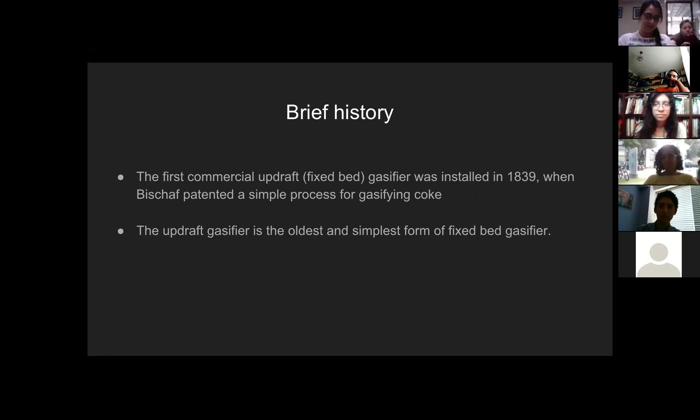So the brief history that we found is that the first commercial updraft gasifier was installed in 1839, when Bischaf patented a simple process for gasifying coke. Also, this kind of gasifier is the oldest and simplest form of a fixed bed gasifier.

The ash is removed from the bottom. Finally, the main product desired in the gasification is the syngas, which is a gaseous mixture composed mainly of carbon monoxide, carbon dioxide, and hydrogen.

So the specific conditions... Genesis, do you want to say that part? Yes, can you hear me? Can you hear me? Yes. Okay, specific conditions.

The feeding of the gasifier, the thermal power of gasifier, the biomass mass flow rate, and the producer gas flow rate are shown. Ah, no, they're not here. Sorry.

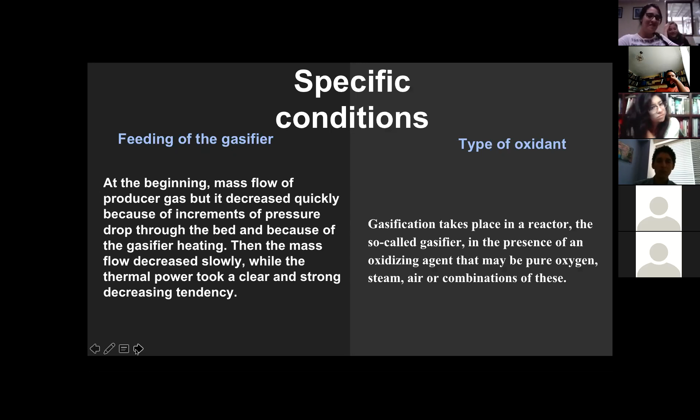At the beginning, mass flow of producer gas was higher, but it decreased quickly, because of increments of pressure drop through the bed and because of the gasifier heating. Then the mass flow decreased slowly while the thermal power took a clear and strong decreasing tendency. Probably at this point, the bed was too dense for the gasifier to work properly.

Later, the type of oxidant. Gasification takes place in a reactor, the so-called gasifier, in the presence of an oxidizing agent that may be pure oxygen, steam, air, or a combination of these.

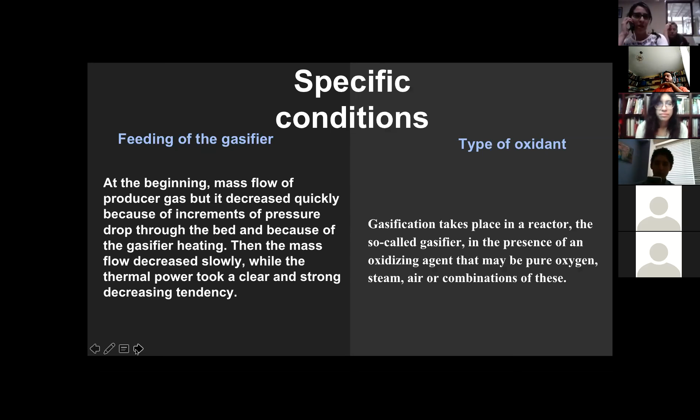And okay, here are the temperature ranges. The gasifier operates at 1,450 to 2,000 Fahrenheit, with syngas exiting at 500 to 1,400 Fahrenheit, and here is the operating pressure.

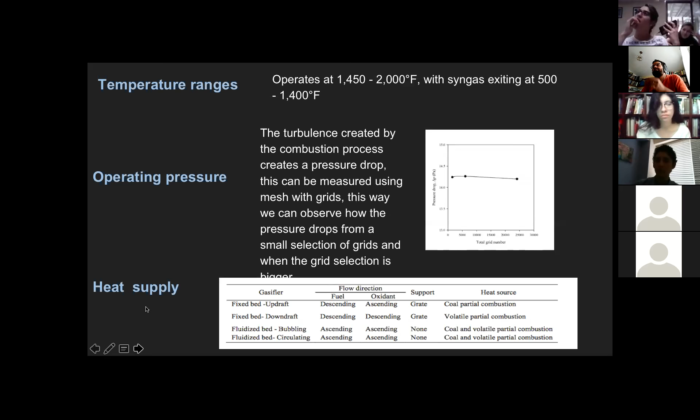And here we have a table with the heat supply from the... the one above. And the next one. Ah, sorry. Thank you.

Then we had concrete examples of industrial gasifiers. We found that the producer gas is rich in hydrocarbons and especially tars, and therefore has a higher calorific value, which makes updraft gasifiers more suitable where heat is needed, for example in industrial furnaces. The producer gas needs to be thoroughly cleaned if it's going to be used for electricity generation.

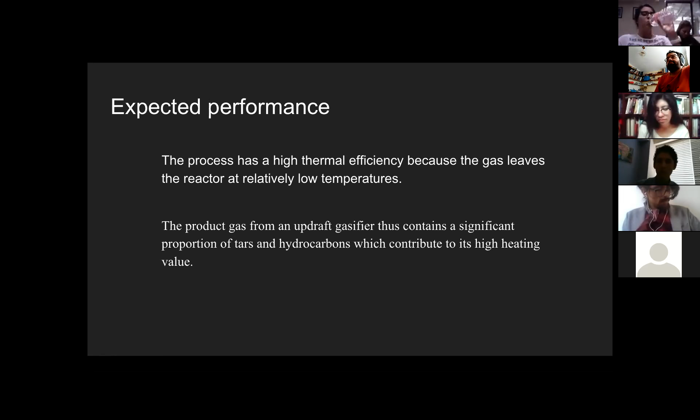Also, we found that this technology is mostly used in thermal applications. The expected performance shows the process has a high thermal efficiency because the gas leaves the reactor at relatively low temperatures. On the other hand, the product gas from an updraft gasifier contains a significant proportion of tars and hydrocarbons, which contribute to its high heating value.

And finally, the conclusions: we found that this kind of gasifier has advantages such as being a simple and low cost process, and also being able to handle biomass with high moisture and high inorganic content. But we also found that the primary disadvantage of this gasifier is that the syngas contains 10 to 20% tar by weight, requiring extensive syngas cleanup before engine, turbine, or synthesis applications.

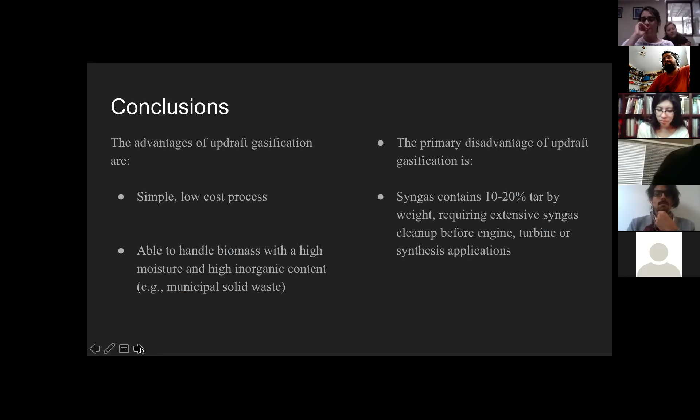And that's all. So this system is one of the most efficient. Yes, it is.

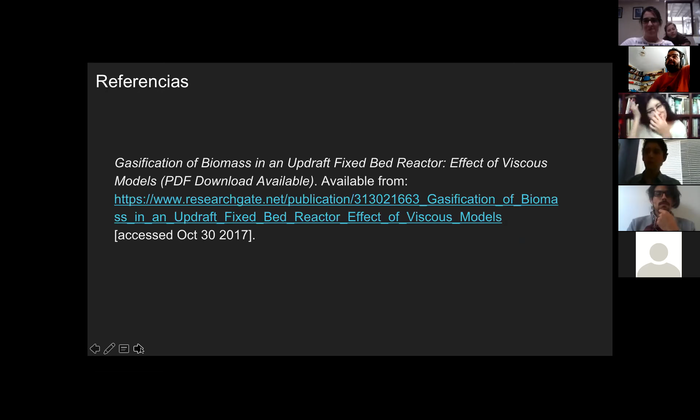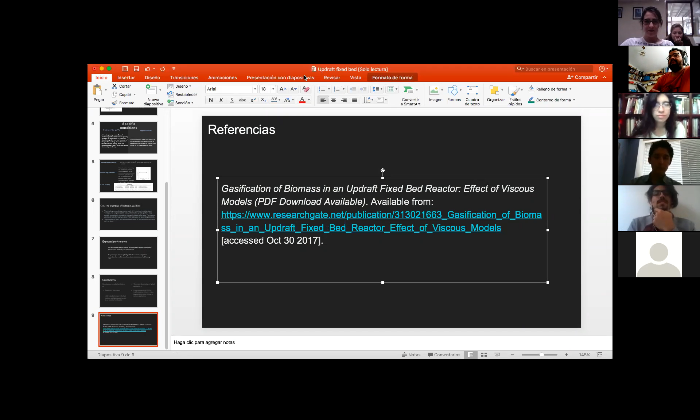One thing you didn't address is that the syngas from that specific gasifier is not a clean gas, right? It has a lot of components like CO2 and some tar that you don't want in your syngas. So it's a dirty syngas, and that should be corrected afterwards, right?

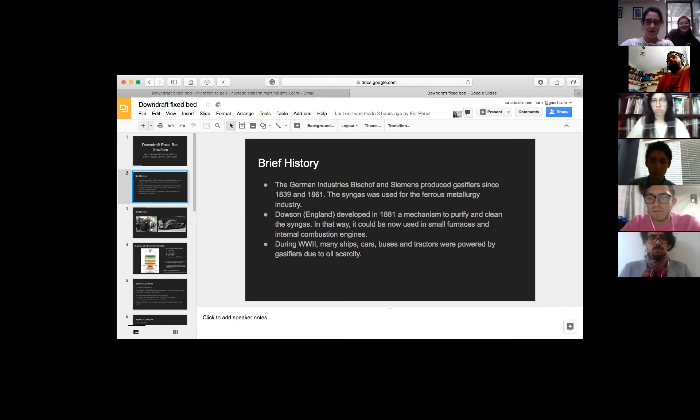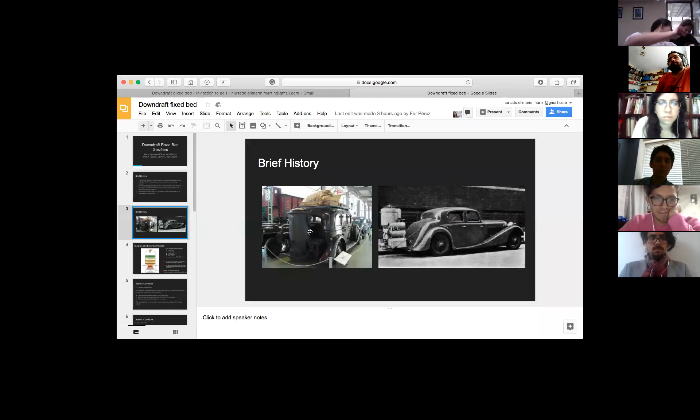Here we can see some examples of cars that had their own gasifier that produced the syngas in order to power them. These cars are from 1941.

Here is a diagram of a downdraft gasifier. We can see that the feedstock is at the site of the gasifier where the biomass enters at the top. After the feedstock comes the drying zone, where temperatures of 100 to 150 degrees Celsius are reached. After this zone comes the pyrolysis zone, where temperatures of 300 to 500 degrees are reached, and here a process of decomposition takes place, with a reassociation of chemical bonds in the presence of little or no oxygen.

After that, there is an air entrance where the combustion process takes place, and in this part the higher temperatures are reached. The tar decomposition takes place, and that results in a less pollutant flue gas and a better conversion to carbon monoxide and hydrogen.

After the combustion section comes the reduction zone, where the syngas is finally formed, consisting mainly of carbon monoxide, hydrogen, and carbon dioxide. Here at the top we can see the main composition of the syngas: not only carbon monoxide, oxygen, and hydrogen are produced, but it also has a significant amount of nitrogen and methane.

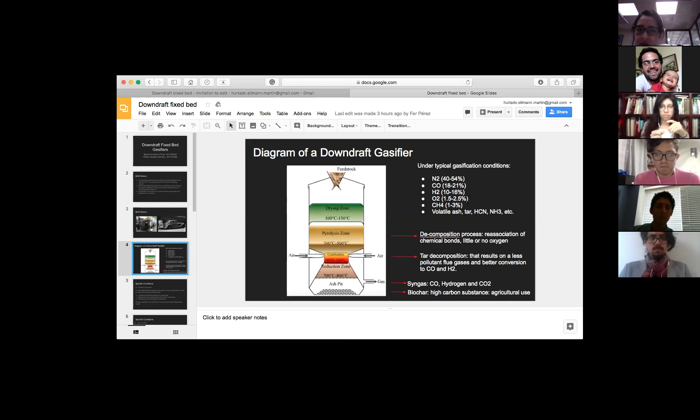We are going to see the specific conditions in which the gasifier operates. This gasifier is generally used for the gasification of wood biomass with the following characteristics: the biomass should be uniformly sized, especially in blocks, which is the best way to feed the gasifier, and it must flow at a constant rate. The moisture and ash content of the biomass is also very important, as it has to be less than 20% and 5% respectively. The biomass put inside the gasifier has to be high density woody biomass, because that way we can have a better syngas composition. This type of gasifier is very sensitive to the size and quality of the biomass feeding.

The type of oxidant is a very crucial parameter to regulate in this gasifier because it determines the calorific value of the syngas obtained at the end. The common oxidants used are oxygen, water vapor, air, or a mixture of them. When we use just air as the oxidant, the syngas will have a lower heating value, so it's not as good as if we used just oxygen. But the best option is to use just steam or a combination of steam and oxygen.

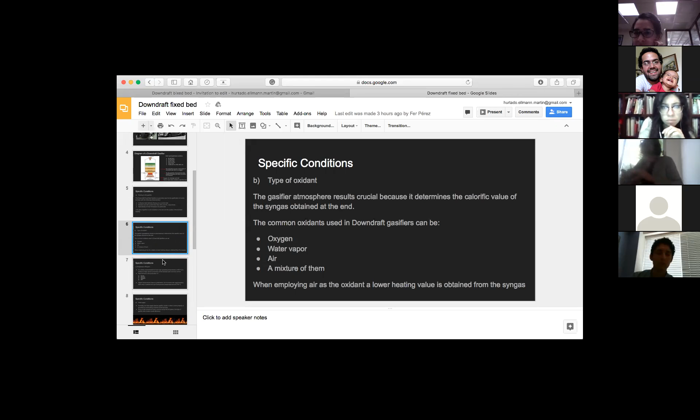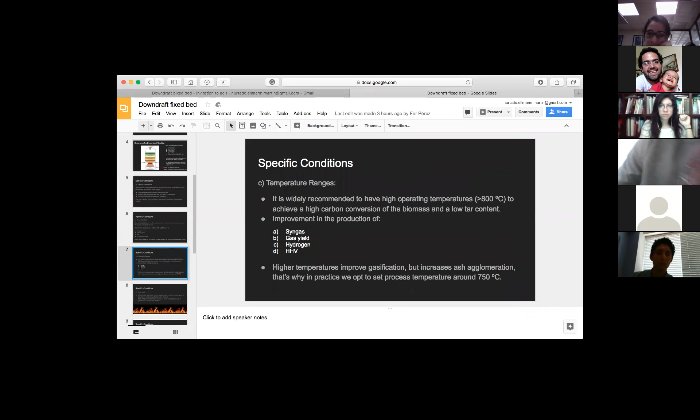The temperature range in which this gasifier operates is very important. It is recommended that the gasifier operates at temperatures above 800 degrees Celsius to achieve a high carbon conversion of the biomass and a low tar content. By reaching temperatures as high as 800 degrees Celsius, we can improve the quality of the syngas, the gas yield, the hydrogen content, and get a higher heating value. But at higher temperatures, although the gasification process improves, it also increases ash agglomeration, so in practice we opt to set the process temperature around 750 degrees Celsius.

The heat supply normally comes from the biomass that is combusted, a fraction of which is employed for this purpose. Since a high amount of heat is carried out by the hot gases, this type of gasifier is a little less efficient than the previous one we saw with the previous team.

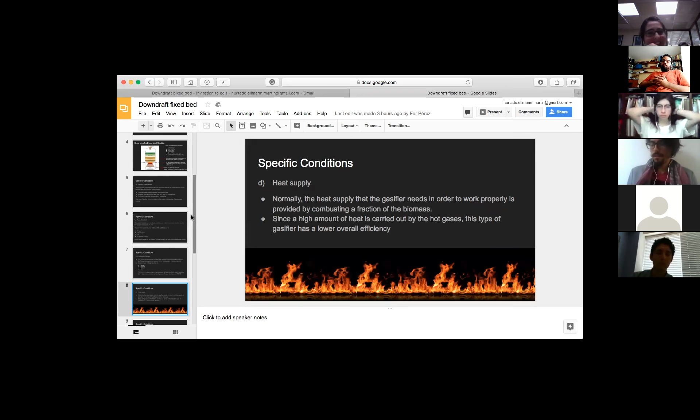The operating pressure of these gasifiers is often conducted under atmospheric pressure, though some can operate under high pressures. Pressures are generally measured in centimeters of water column, and 1 atmosphere is equal to 1,029 centimeters of water.

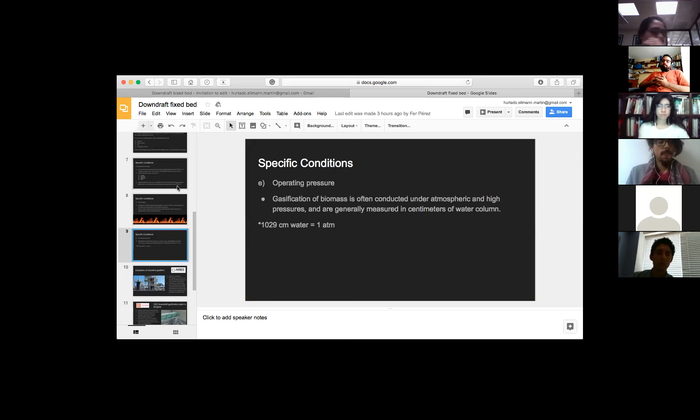Now examples of these gasifiers in industrial processes. The first one is in the city of Lebanon, Tennessee, made by the company Aries Clean Energy. It has a full capacity of up to 64 tons per day of waste and produces up to 420 kilowatts of electricity. It produces syngas using wood waste, scrap tires, and sewer sludge as fuel, which are then converted to on-site electric power for the operation of the wastewater treatment plant in the city.

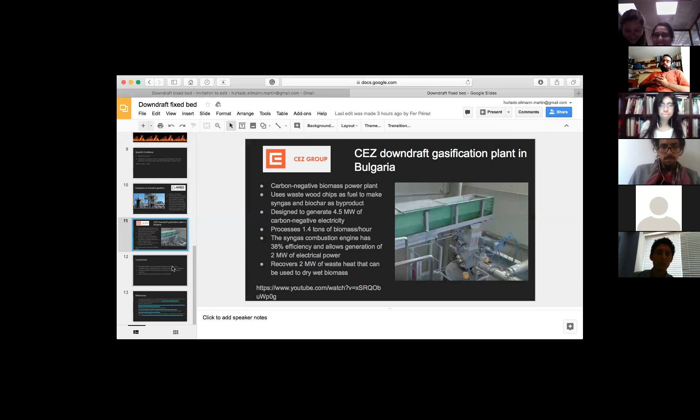As conclusions, downdraft gasifiers are a good option for using biomass as fuel because they are a competitive way to obtain fuel gas for combined heat and power generation. This type of gasifier requires the biomass feed to be in very specific conditions, and as we saw from the previous example, cleaner byproducts can be obtained from this process.

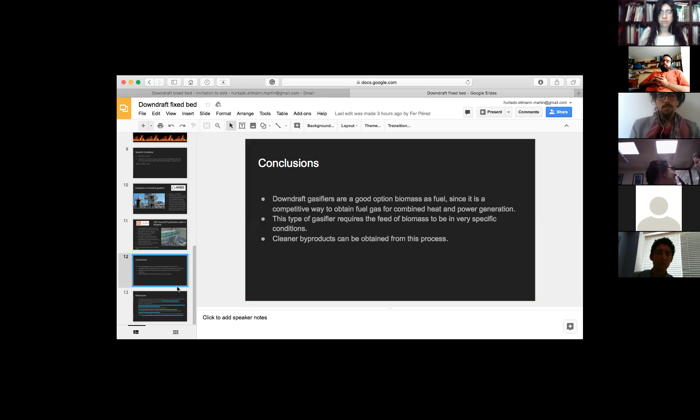No, teacher. Okay, the only problem with that particular gasifier is that the heart of it, where the pyrolysis and combustion take place, is very difficult to design because any leakage of air will produce a different combustion. And if the heat doesn't stay at the heart of the gasifier, the whole process starts to run badly. It doesn't allow the reduction zone to convert carbon dioxide to carbon monoxide and hydrogen, and so on. So that's the problem with that gasifier.

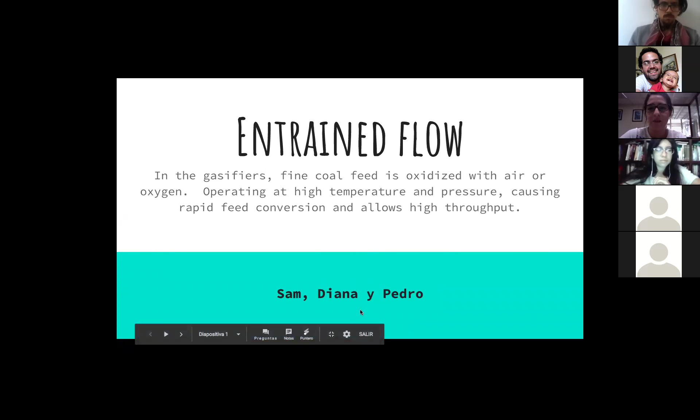This type of gasifier operates at high temperature and pressure, which helps create rapid feed conversion and converts the coal into energy.

This gasifier has existed for more than 200 years, and nowadays it has become a better solution to convert energy, because natural gas has increased in price, and its transportation has become difficult since it comes from different countries.

Also, this gasifier is fundamental for energy conversion technology, because that technology is based on synthesizing any carbon-containing material into gas. This adds value to low or negative value feedstocks, turning them into marketable fuel products.

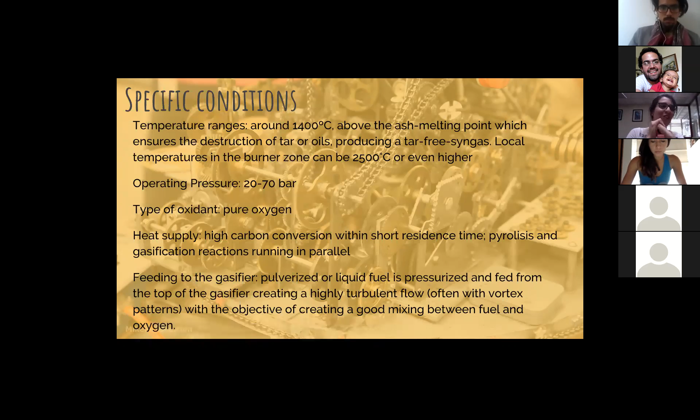So in this company, the technology most used is the one applied at dry feed pressurized, the one that Sam explained in the last slide.

Also, this type of gasifier works preheated, 95% with pure oxygen and steam, and in this case they are mixed. The gasifier doesn't only work with oxygen or only with air, it works with both.

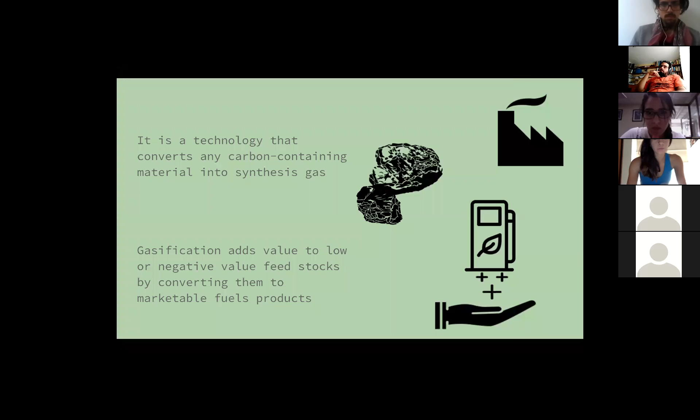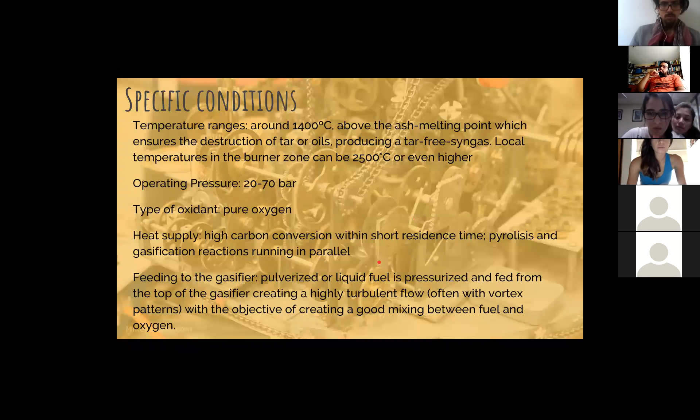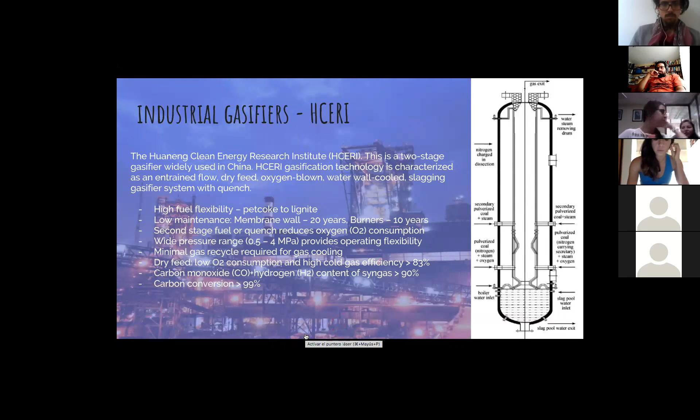It has high fuel flexibility, it can take any type of fuel as long as it's pulverized. It also has low maintenance and lasts approximately 20 years. It has low O2 consumption, and in general these gasifiers have very good conversion efficiency, typically above 80%, and for this one it's over 99%.

Taking into account all the specifications of this type of gasifier, its main advantages are good fuel flexibility, though this can cause some problems I'll mention later. It also produces a generally tar-free syngas, meaning less residue to clean in the process. It has very high carbon conversion, approximately 99%, and a short residence time. According to the National Energy Technology Laboratory, it's considered the most environmentally benign gasifier.

And its main disadvantages are...

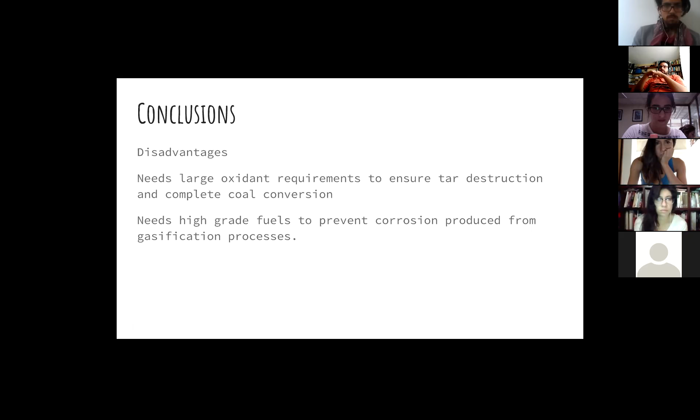Do you have any questions, guys, about this one?

This gasifier is one of the most efficient, but at the same time you need to design it very carefully, because the current of the oxidizer and the fuel have to meet correctly at certain points in the gasifier for it to be gasified. Otherwise it's only going to be combustion. So you need a gradient of oxygen through the gasifier, so that at the bottom part you can have the reduction reactions to obtain the CO and hydrogen. So it's interesting, but it's difficult to obtain good results.

So now we have team number 4: Gabriela, Monse, and Ricardo. Are you ready, guys?

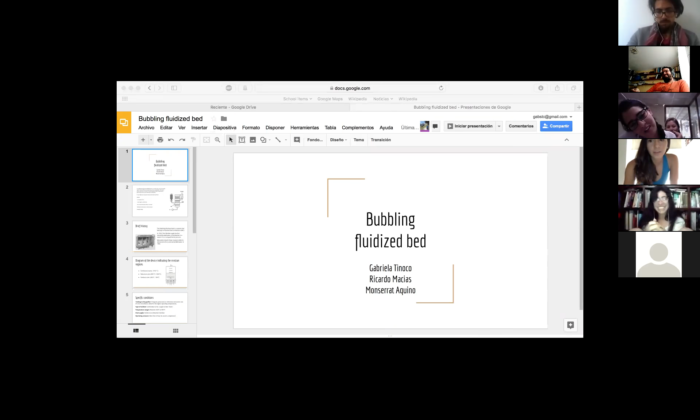Hi. We're going to explain the bubbling bed boiler. This boiler can also handle fuels that are difficult to pulverize or less combustible.

This technology has been used primarily by the pulp and paper industries to burn wood, as well as peat and other low heat fuels. Next, please.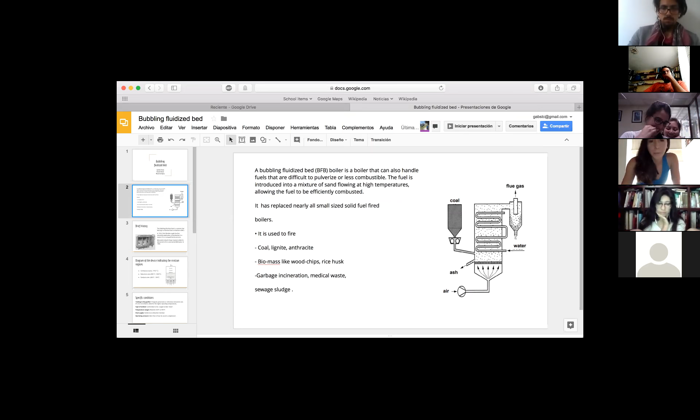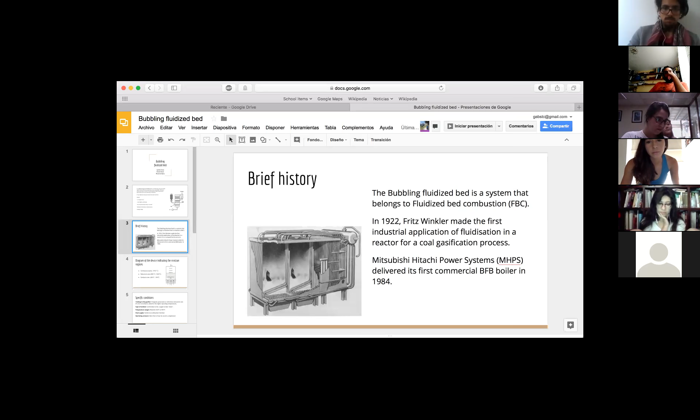A little story: the bubbling fluidized bed is a system that belongs to fluidized bed combustion and shares the same history. The first technology was invented for Mitsubishi Hitachi in 1984.

In the reduction zone, the products of partial combustion, water, carbon dioxide, and uncombusted partially cracked and pyrolysis products pass through a red hot charcoal bed where further reactions take place. Heat temperatures in the reduction zone are normally between 800 and 1000 degrees. The lower reduction zone temperatures were around 700 to 800, more or less.

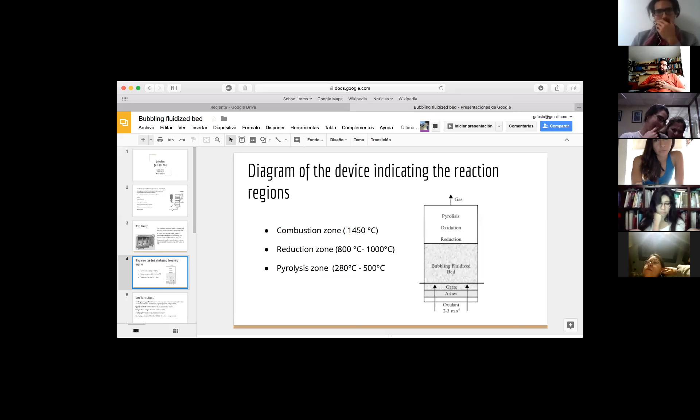The next zone is pyrolysis, which takes place between 280 and 500 degrees. For the specific conditions, the feeding has to be chopped, pulverized, reduced in size, and dried for the gasifier to operate at high temperatures.

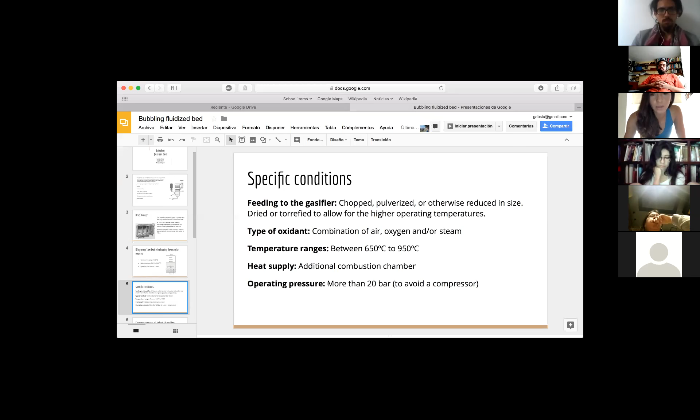The type of oxidant can be a combination of air, oxygen, or steam. The ranges are between 650 and 950 degrees. The heat supply is usually an additional combustion chamber. The operating pressure is recommended to be more than 20 bar, to avoid a compressor, but this is related to the feeding having those specific characteristics.

We found three concrete examples of industrial gasifiers. The first one was the KBR transport gasifier. It was tested and proven at the Power System Development Facility in Wilsonville, Alabama. It operates either with oxygen or air, as mentioned before. The design is based on fluidized catalytic cracking technology, and internal temperatures are around 1500 to 1950 Fahrenheit, depending on the fuel. It also operates at a high solid recirculation rate, resulting in excellent gas-solid contact in a highly turbulent environment.

When air is used, it's for power generation, and when oxygen is used, it's for fuels production.

This is the second example: the high temperature Winkler gasifier. It was also tested in Germany. It operates either with oxygen or air, and has a dry feed pressurized dry ash design, capable of gasifying different feedstocks including low-rank coals with a higher ash softening temperature, and also many biomasses. The resultant gas has no high molecular weights, and solids are removed in the cyclone and returned to the gasifier base to maximize carbon conversion.

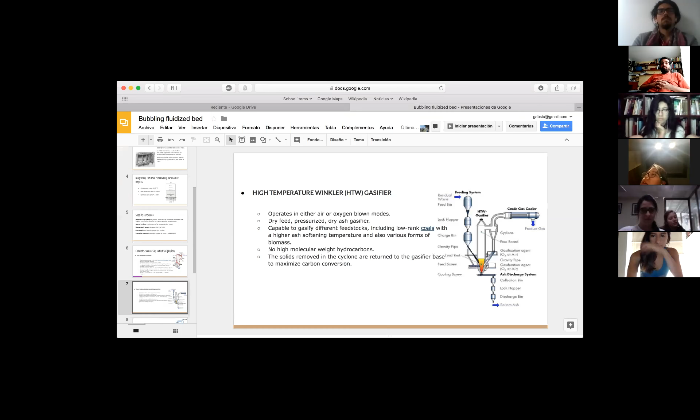There's an image of the whole process. It's kind of complicated, but this is a summary.

This is the third example we found, also called the high temperature Winkler gasifier. It uses U-gas gasification technology. The fuel reacts at temperatures from 840 to 1100 degrees, and a pressure from 3 to 30 bar. The syngas can be used for heating applications, generating power, or making chemicals or fuels.

In the reaction, big ash particles are formed, and the ash is removed from the fluidized bed by gravity. This design ensures that the larger ash particles exiting the gasifier contain minimal amounts of carbon, aiming to have 95% or more of the fuel's carbon gasified.

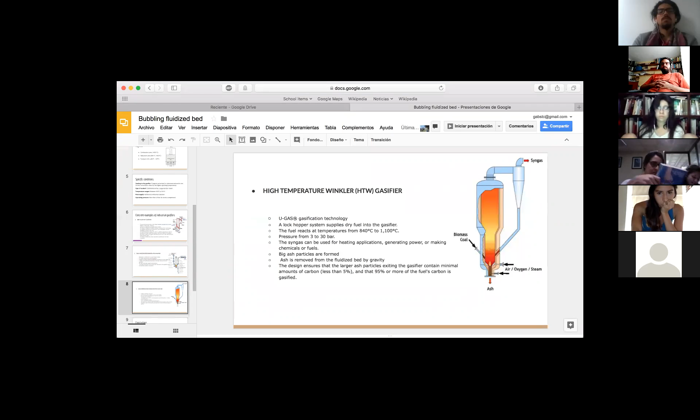As mentioned before, particle size reduction and drying the biomass are necessary. Gasifiers of this type are the lowest capital cost options for biomass, and are also quite suitable for fuels, chemicals, and hydrogen production. That's all.

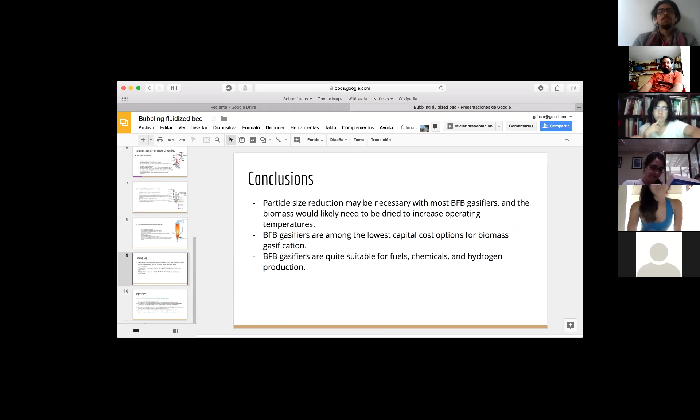So, guys, I remember the class we had about... what was the name of that one? Operaciones de transferencia de momentum. Well, that one, yeah, we saw the bubbling beds, right? It's the same principle, of course. The whole point of using a packed bed or a fluidized bed is to have all the fuel getting everywhere, so the reaction is better, right?

We're going to talk about circulating fluidized bed. A brief history of this process: in 1921, Fritz Winkler discovered how to optimize the Haber-Bosch process and the main principle of coal gasification. In 1938, Warren Lewis and Edwin Gilliland discovered fluid catalytic cracking and also the fast fluidized bed process. In 1960, Douglas Elliott also discovered the bubbling fluidized bed. And finally, also in the 60s, the Ahlstrom group started commercializing the first circulating fluidized bed gasifiers.

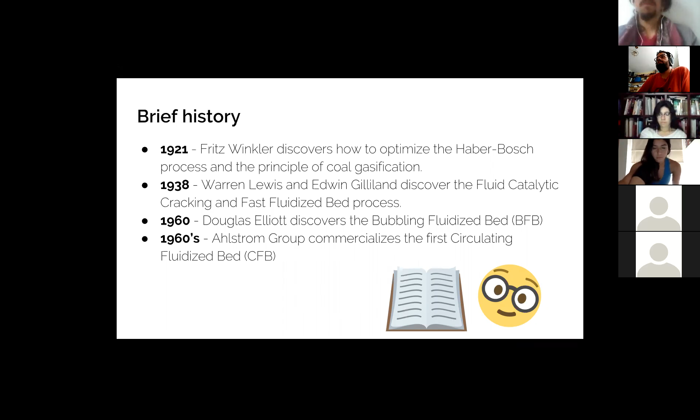For this diagram, first, the function of a circulating fluidized bed is mainly through a fluidization mixing process. What happens here is that the fuel is not burned with fire like the fixed beds. Instead, in the circulating fluidized bed, air is supplied from the bottom of the chamber at high pressures, and this lifts the bed material and the coal particles, keeping them in a suspension state. In this state is where the coal combustion takes place.

Also, the process of fluidization or mixing is through this path. The particles of coal that are not burned or combusted keep running through the cycle, and the gas that is provided by this process goes through this path. And finally, there is the syngas that all of my classmates talk about. Well, it's essentially that.

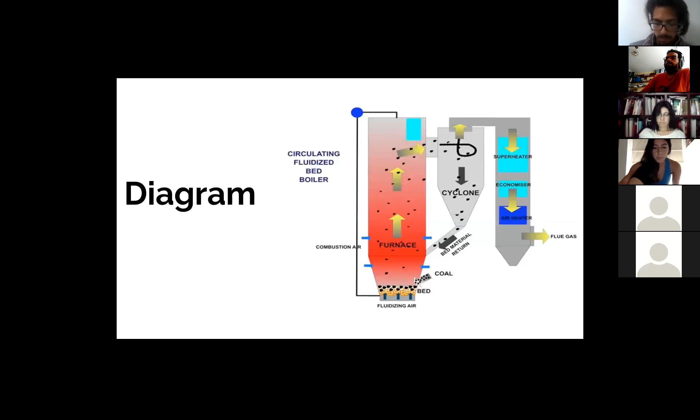Also, with the coal particles and all the fuel used here, limestone is mixed, and this limestone captures the sulfur oxides, which makes the quantity of pollutants not as big as in other processes.

The specific conditions for feeding to the gasifier: steam is fed into the base of the fluidized bed through a sparge pipe type of distributor. The type of oxidant is, in most systems, oxygen, but some articles test with butane, though all the systems use oxygen. The temperature ranges are 850 to 900, and the heat supply comes from burning the char in the lower section of the bed.

And the operation pressure is 285 bar, but the oxygen is supplied in the chamber as primary air and secondary air. The secondary air can be at other levels to improve the combustion.

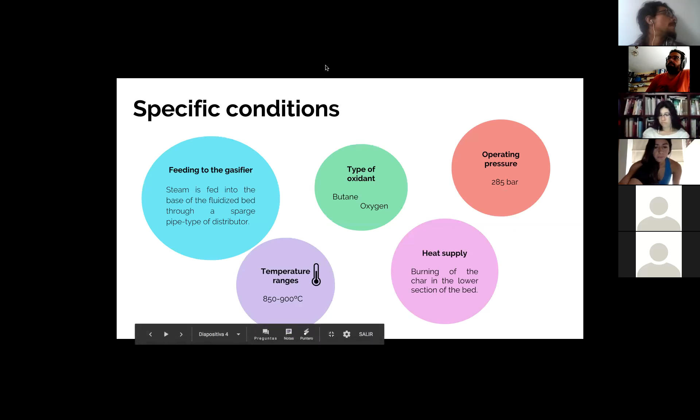This example produces energy, 150, and they have 2 cyclones to improve the efficiency. You can see this cycle, the first in the part of this cycle, and then the other is more in the... and these use coal or waste fuel like pine and bark. Their temperature function is 535, and their pressure is 113.

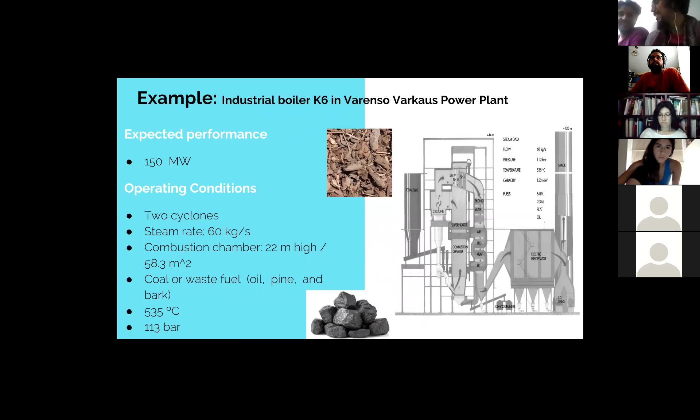For our conclusions, first, this process has a lot of fuel flexibility. For example, it's not restricted to just one type or size of fuel, unlike some fixed bed gasifiers. Coal residue, wood residue, gas, and also agricultural waste like straw and husk can be used, and the efficiency is still going to be in the same range.

In this case, the efficiency of this type of boiler goes from 97.5 to 99.5%, and this is also because it has better gas-solid mixing from the process I explained earlier, and also because of the higher burning rate that comes from the fluidization mixture between the coal particles and the limestone. Also, because of the low combustion temperature, there are low emissions of nitrogen dioxide and also lower emissions of sulfur dioxide. However, the emissions of nitrous oxide are higher.

Also, something we didn't put in here: this kind of gasification process is used in the Fischer-Tropsch process, which is known as one of the main processes to produce liquid fuels from coal and also from biomass. So using this kind of fluidized bed boiler can make these types of processes more environmentally friendly. And that's it.

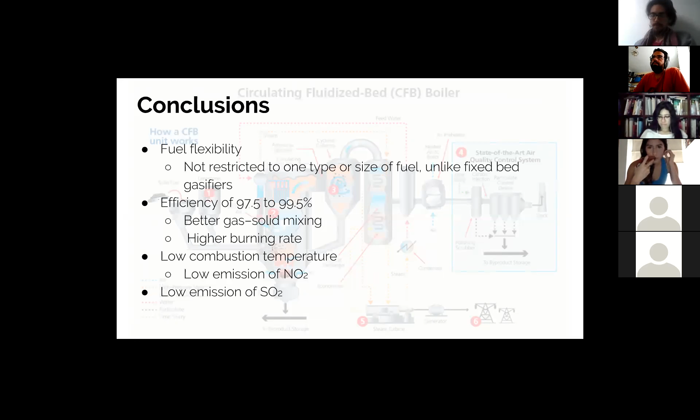Very good, guys. Do you have any questions for this team?

One thing that I find interesting about these gasifiers is the use of limestone, right? So they add a pollutant management system inside of the gasifier. That one is interesting, and of course the use of any kind of fuel is very interesting too. Sam, you have a question?

Yeah, I don't know if they explained it, but I didn't get why the pressure needs to be so high. The what? The pressure, I think they said it was like 200 bars or something like that. Yeah, around 200 atmospheres, right? Yeah, why is it so high? In the other ones it wasn't that much.

Can you answer that question, girls? I think it's because of the principle of the process. I read a little bit about that, and to have most of the coal particles in suspension, higher pressures are needed to allow this. If you have lower pressures, the air coming from the bed is not going to be enough to suspend the particles and also keep the cycle going, in which the particles keep coming to the furnace until they become syngas.

Okay, so we are Isa and Pamela, and we're going to talk about the dual fluidized bed gasifier.

A brief history: the pioneers of the DFB are D. Kunii, who in 1975 had a demo plant in Japan, and the oxygen donor process was considered another pioneer of the DFB development. In 1984, the TNEE company developed a dual fluidized bed with a capacity of 500 kilograms of wood per hour.

Operated at 800 degrees Celsius. Also in 1992, FERCO patented a DFB biomass gasifier that had low hydrogen content, but high tar content, between 23 and 32 grams of tar. What all these processes had in common is that all of them ceased operations, and in the case of FERCO, the reasons why haven't been published.

Up to 2007, an Austrian team worked on one DFB, and the advantage of that gasifier is that 90% of the water didn't react.

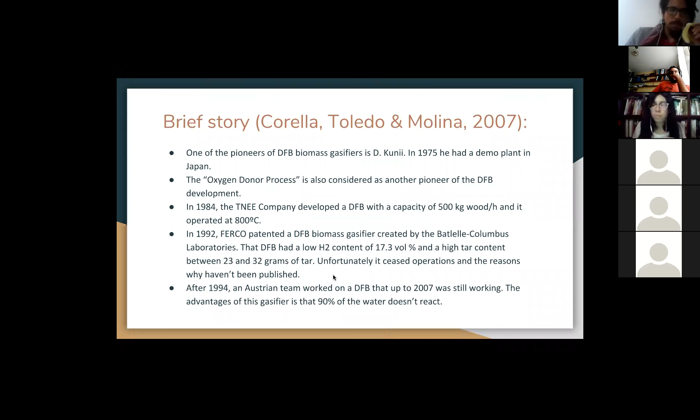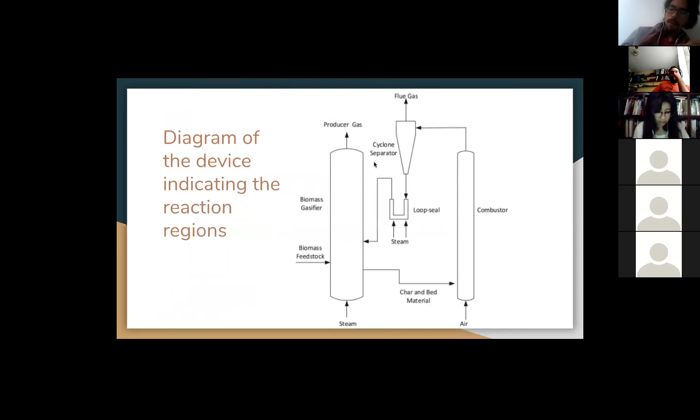Isa: So usually the parts of the dual fluidized bed are first a bubbling fluidized bed for the gasifier, and as a combustor, a fast fluidized bed. And in the pyrolysis...

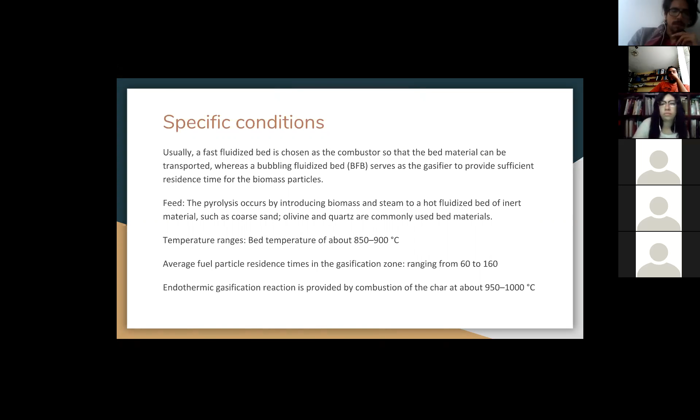The feed is the biomass, and it is fluidized with hot steam, boiled steam. Usually the materials used as bed material are sand, olivine, and quartz. The temperature ranges of the bed are about 850 to 900 degrees Celsius, and in the endothermic gasificator, it is about 950 to 1,000 degrees Celsius.

The first example that we found is a dual fluidized bed in Güssing, Austria, and the expected performance is 8 megawatts fuel power, 2 megawatts of electrical output, 4.5 megawatts of thermal output. It has an average of 81.3% total efficiency and 15% moisture content. Also, in the table, you can see the particulates that exit, which are tar, particulates, and ammonia.

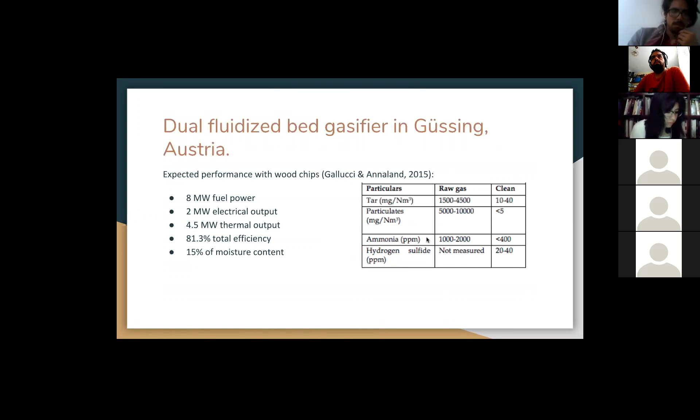The operating conditions are that the biomass is gasified at 850 degrees Celsius. The consumption of fuel is 2,300 kilograms per hour. The real efficiency is between 65% and 76%. The thermal and electrical outputs are the same as expected. Then the gas is cooled to about 160 to 180 degrees Celsius. The bed material they used is limestone, and air and steam enter the system at atmospheric pressure.

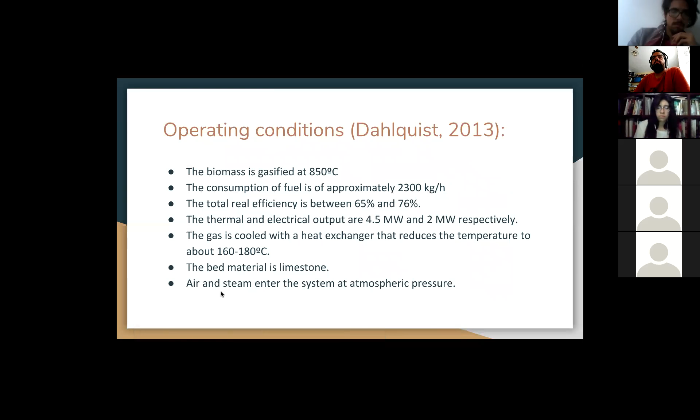Isa: Well, the dual fluidized bed in Germany is another example that uses logging residues, mostly wood chips, but also a percentage of bark and needles. They have variable particle size and moisture, but they usually produce 15 megawatts of fuel power.

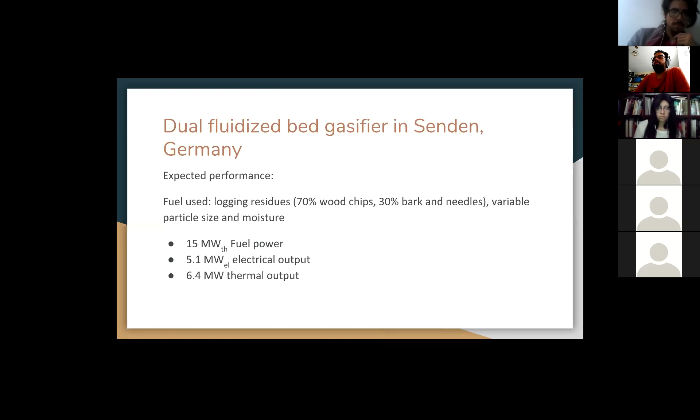Which is 5.1 megawatts of electrical output and 6.4 megawatts of thermal output. You can see here the process.

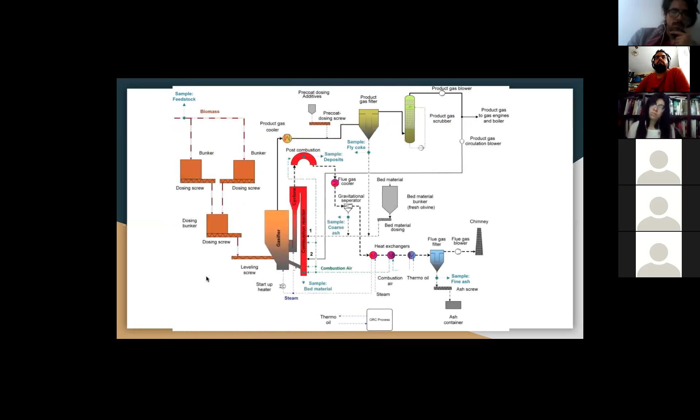The bed material they use is olivine, and the biomass is gasified at 850 degrees Celsius. They also use calcite to help, like a catalyzer. Then in the combustion zone, up to 900 degrees are reached.

But then the gas is cooled down in post-combustion, and the heat is used by heat exchangers, where they cool down the product gas, which is used to generate electricity and heat for the same process.

The conclusion we had is that biomass gasification plants are a good option if the place has biomass available. In the case of Austria, it's a little town surrounded by woods, and since it was far away from the cities, the government decided to create energy through the DFB plant, using the biomass available.

Some advantages are that they don't produce CO2, and since the gasification reaction and the combustion reactor are separated, the gas is free of nitrogen, there are no liquid emissions, and there is lower tar because steam is the gasification agent. Also, an advantage of the process is the recirculation of materials: the char and sand are first in the pyrolysis and then go to the combustion zone, and the heat produced in combustion serves the process of pyrolysis.

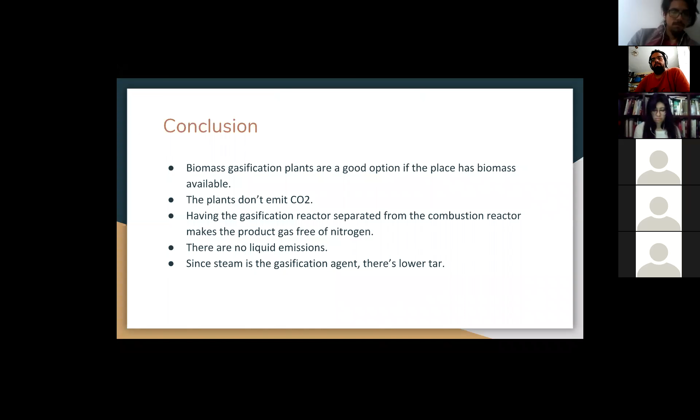Well, and that's it.

Very well, thank you, girls. Do you have any questions for this team, guys? Nope, me neither. It was pretty clear what the advantages were and so on.

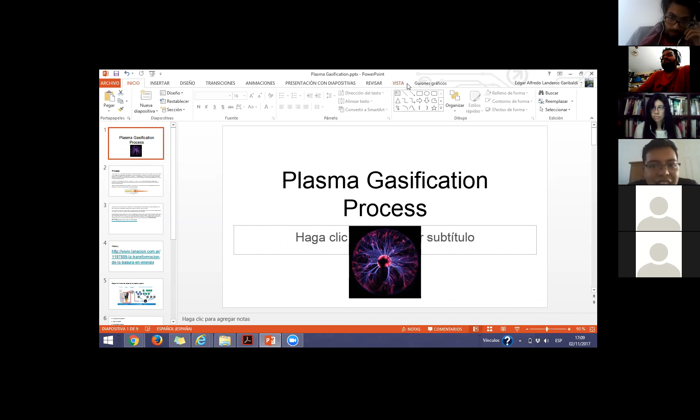You have to put the full screen as in any presentation in the lower right. Next one, another icon, another. Edgar.

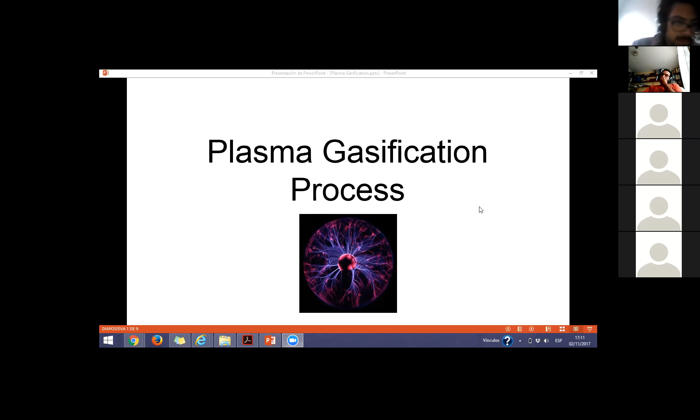The plasma gasification is an extreme thermal process and it uses plasma, which converts the organic matter into syngas, made primarily of hydrogen and carbon monoxide. A plasma torch powered by an electric arc is what ionizes it, generating the heat that burns all the material, all the biomass, and it is used commercially as a form of waste treatment and for gasification of municipal solid waste.

There is a picture of the plasma torch, and it uses a plasma gun. It provides energy by DC current and AC current. It can be both, and there are also radio frequency torch designs. The DC torches are the most commonly used and researched.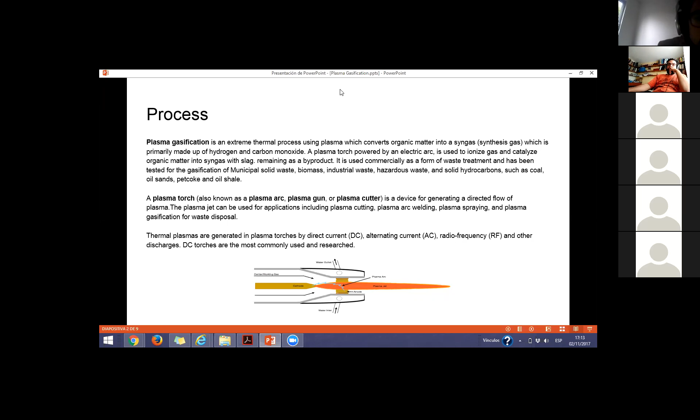Edgar? Do you have the presentation, Rui? Yes, I'm going to put it up. I'll put it.

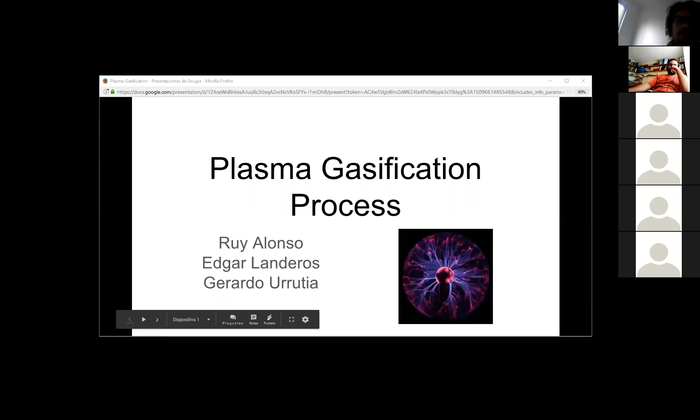Sorry about that, so we will start over again. First of all, we will go through a little bit of history. It's hard to find history about this process because it's quite new.

But it was invented at first to decompose and destroy hazardous waste and to melt ash from all the wastes. So it has been used for over 30 years, but the first big and massive applications were at the Hitachi plant in 2002.

That plant had a capability of about 24 tons of municipal solid waste. The other plant, which is bigger, also in Japan, has a capacity of 300 tons of municipal solid waste, and it is able to generate about 7.9 megawatts per hour.

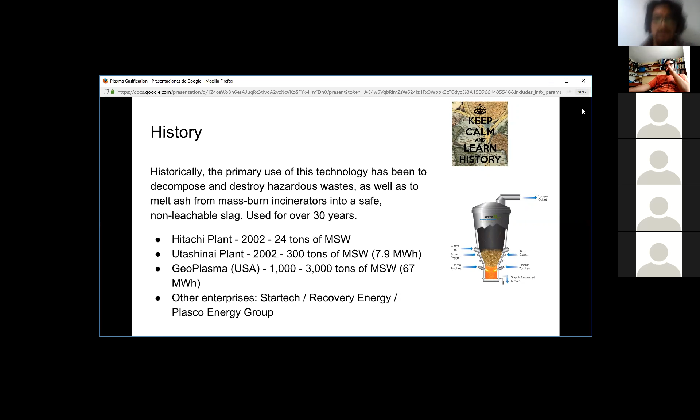And here in America, we have the Geoplasma plant, which is able to gasify from 1,000 to 3,000 tons of municipal solid waste. There are other enterprises developing this technology, and there are the names.

Next, please. When you zoom into the gasification process, you see that first, at the top, there's a drying phase. This is because when you get wet feedstock, you need a lot more energy, and you obtain less syngas.

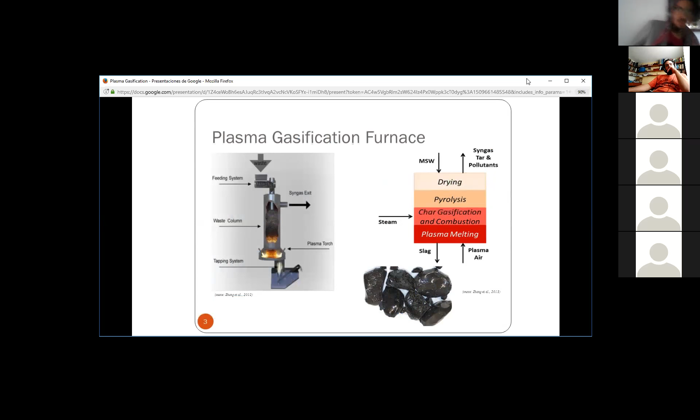So after the drying process, right below it, you have the pyrolysis. At the bottom of the pyrolysis, there's an entrance of steam where char gasification and combustion happen. And at the very bottom, you have the plasma torch, or plasma intake, where all the melting phase occurs, and you get, as a result, slag and your syngas.

Well, this is the syngas, and the high temperature of the plasma prevents the formation of many toxic compounds, like nitrogen oxides and sulfur dioxide, and this makes this process much cleaner because of the intense heat of the plasma.

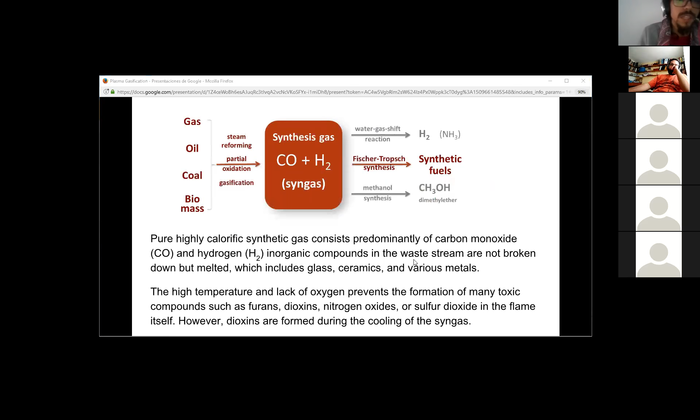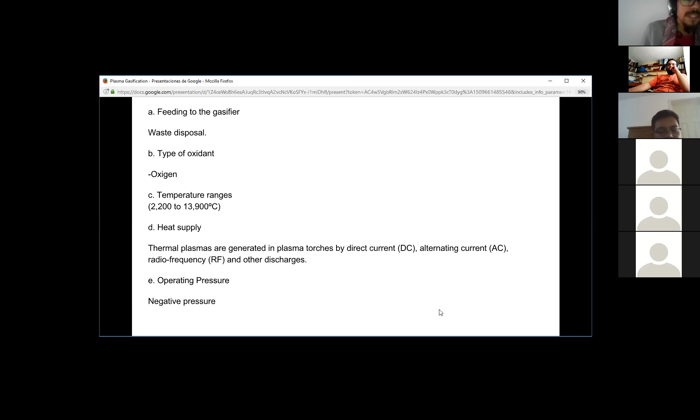So the feeding to the gasifier is primarily waste disposal. As for oxygen, the less oxygen, the better and more efficient the process is. So oxygen is not required, and the temperature ranges are over 2,200 to 13,900 degrees centigrade. The heat supply comes from the plasma gun, and the negative aspect of the operation is the negative pressure.

So if we want to talk about industrial applications of these gasifiers, the best gasifiers we found for this technology were the ones developed by the Westinghouse Plasma Corporation, which can gasify about 1,000 tons per day of municipal solid waste, and they are able to generate 50 megawatts in a combined cycle power production.

With these gasifiers, you get 65,000 normal cubic meters per hour of syngas, and they consider this a clean gas. This clean syngas can be used to displace many other technologies related to fossil fuels. Just to mention, for this kind of industrial gasifier, we noted the weight and dimensions of the G65 gasifier, which has a height of 25 meters, so it's almost like a building.

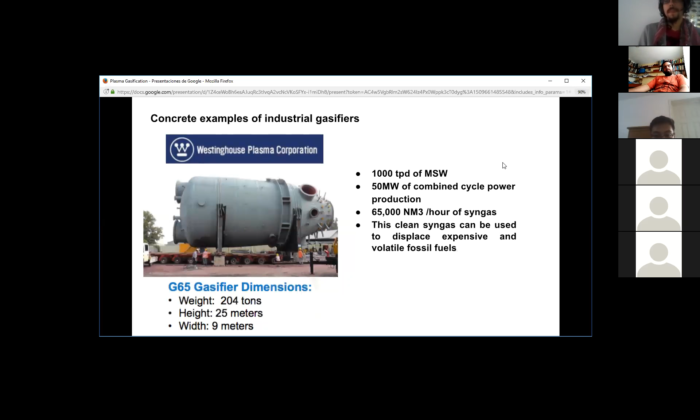The conclusion is that this is a viable solution, talking about the feedstock, because plasma can reduce municipal waste disposals, and it can burn any kind of material because of the intense heat. Everything is evaporated or turned into ash.

The main advantages of the plasma torch are a more clean destruction of the waste, and the ashes generated are not toxic particles, so you can dispose of them in a secure place inside the earth. The production also yields value-added metals, which you can sell as another income source.

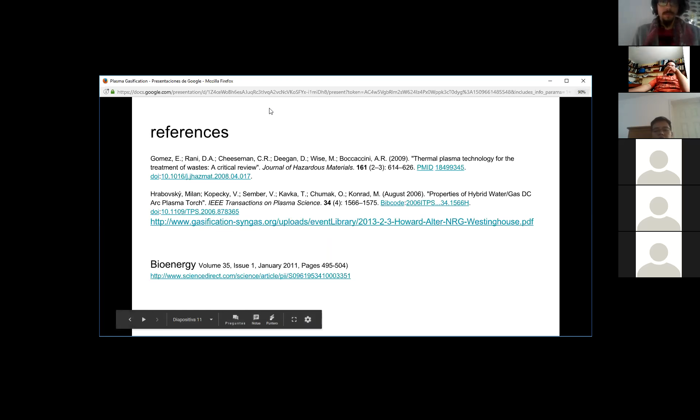Well, I don't have a question either. It's an interesting gasifier. The main advantage, of course, is the way it can process anything that you throw into it, and that you can recover metals and so on. The problem is that to use plasma, you need a lot of waste to make it viable. It's not economically viable otherwise.